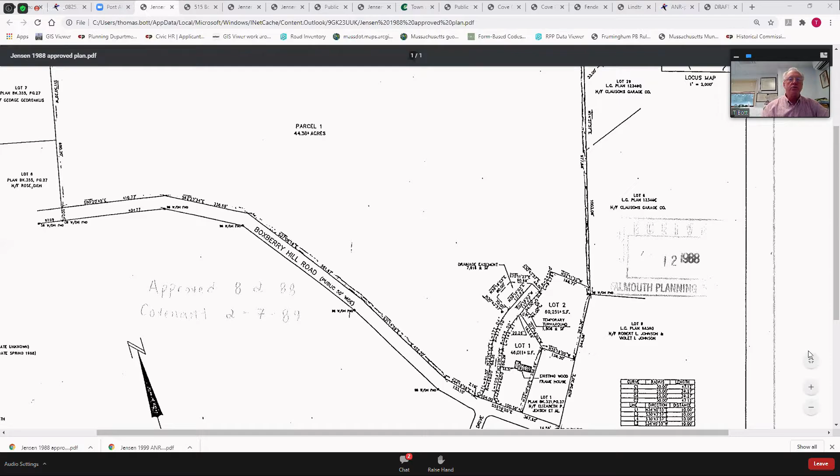So likely what you're seeing right now is a copy of the subdivision plan from 1988, showing this corner of the property in the bottom right here. I can zoom in a bit bigger if you like.

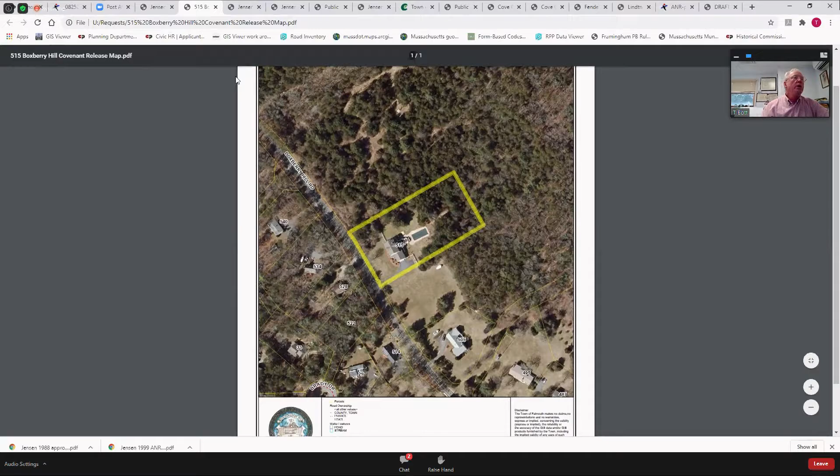Essentially, the subdivision plan was in this corner of the property. Mr. Jensen's property, 515 Boxberry Hill, is here in the middle of the property, and down on the bottom you see the remnant of the subdivision layout here. Mr. Jensen's lot was created by this A&R plan in 1999, as were two other lots and then a third lot in this corner here.

None are subject to the covenant because the covenant was for the subdivision here in the corner of the property. While the original parcel 1 was included in the subdivision, the planning board at that time had a provision in their decision that the subdivision would be automatically rescinded as of a certain date if the improvements weren't put into place. In fact, in 1991, that was expiring. Then around that same time, they filed an extension of the covenants until, I want to say, 1996. I have that on another screen here, but I don't want to trouble the board with too much of this. So the subdivision went away because of a lack of performance.

Lot 3 was created after the subdivision, and it fronts on Boxberry Hill. It is really not the subject of the covenant, nor were the other 3 lots created up here in the far left corner.

As I pointed out before, this is an artifact from an earlier subdivision plan—much like that commercial property we saw on West Falmouth Highway, where there was a covenant remaining for a subdivision plan that was actually office buildings at that time. So it's an artifact. It puts somewhat of a cloud on the title that someone had seen.

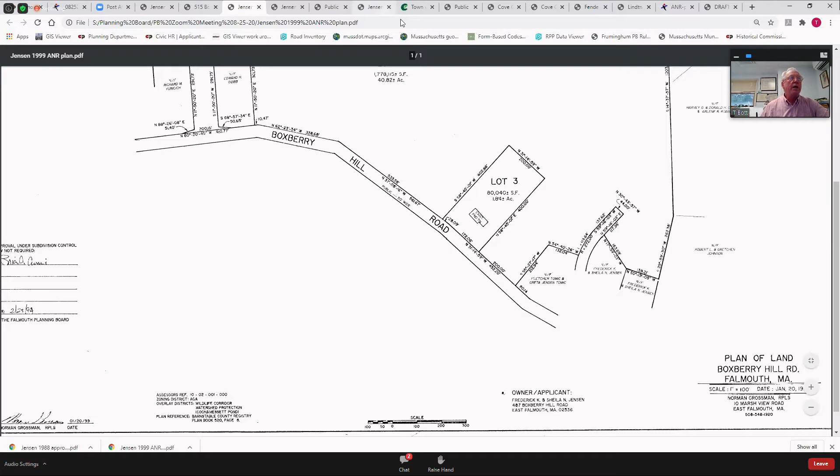You see both here and in the GIS that there is not a—let's see if I can get this out of the way. Both here and in the GIS, let's try that one. There is no second lot back there.

So 515 Boxberry, Mr. Jensen's lot, and the other 3 that were created out of this in earlier dates through the A&R process as well. I'd be happy to take any questions.

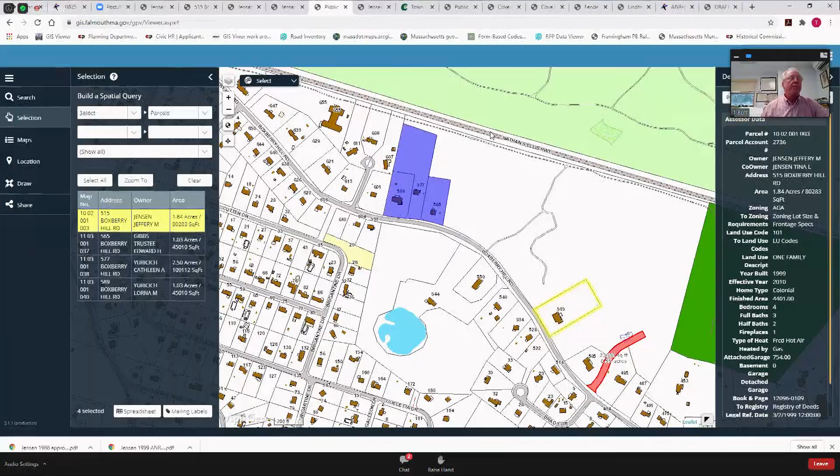Okay, does anybody have any questions of Tom? Yes, Jim: is there a letter in the file saying that the subdivision has been rescinded? That's all I asked, if there was documentation.

The decision from the planning board from 1988 had an automatic rescission—so if you didn't perform, the subdivision was rescinded. It's not a bad thing to put in all of our subdivision decisions. But there's nothing in the file that says the subdivision has been rescinded, other than the planning board's decision that says it's automatically rescinded if they don't build the road prior to this date.

But didn't they ask for an extension at one time and try to keep it? I'm just a little unclear about that. Let me just let you know that I saw that extension too. The extension actually had 4 signatures—of my parents and my aunt and uncle. None of them signed it. So I don't know how that thing came up.

Nobody signed it. If you look at it, Tom—I just saw that when I was looking through stuff, and there's a thing on file with the register of deeds and nobody signed that. You guys did the extension. I don't know how that worked out, but there were signature blocks for those 4 people, and see, nobody signed it. It's recorded. Somehow it should make this go away and we'd be all set.

Can we do that tonight? As soon as the board makes a motion to say we release lot 515 from the covenant, it'll all be gone away. So moved. Second. Okay, it's been moved and seconded. Is there any further discussion of this matter? Please, show of hands in favor of releasing the covenant. Okay, all 7 of us, by show of hands, have voted that.

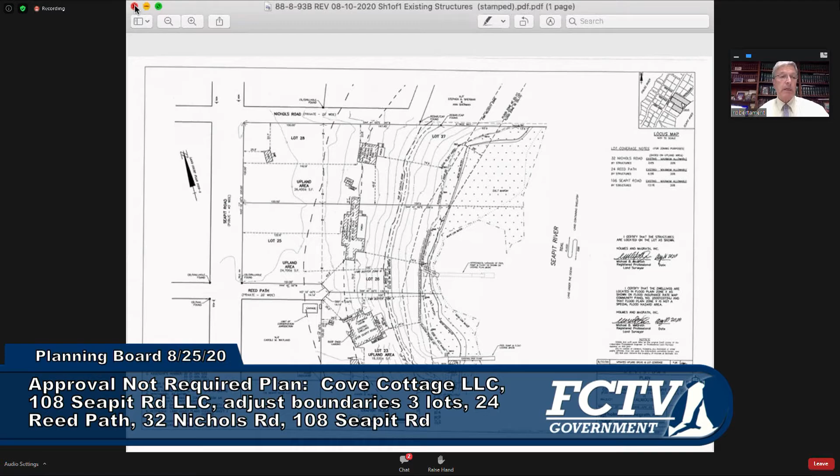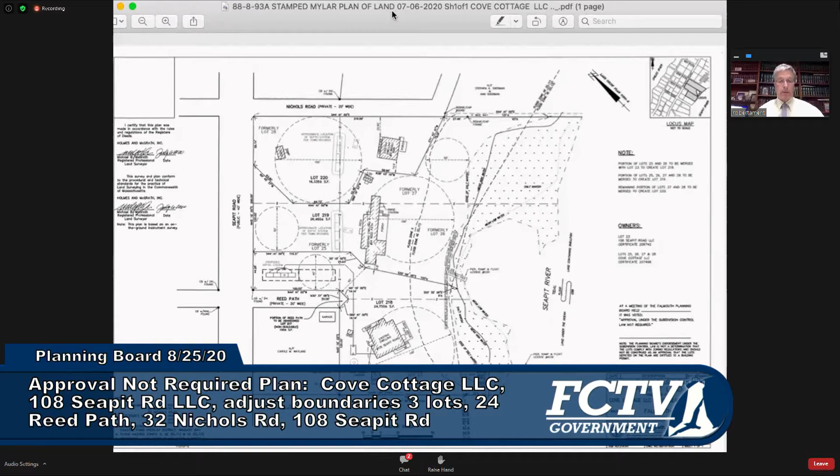So what I'll try to do now is go to the A&R plan, which shows how we're trying to adjust the lot lines. It says I've closed the sharing, so I'm going to do that again and try to select the right plan. Okay. So my hope is that you now see a plan entitled Plan of Land, and it shows new lot lines.

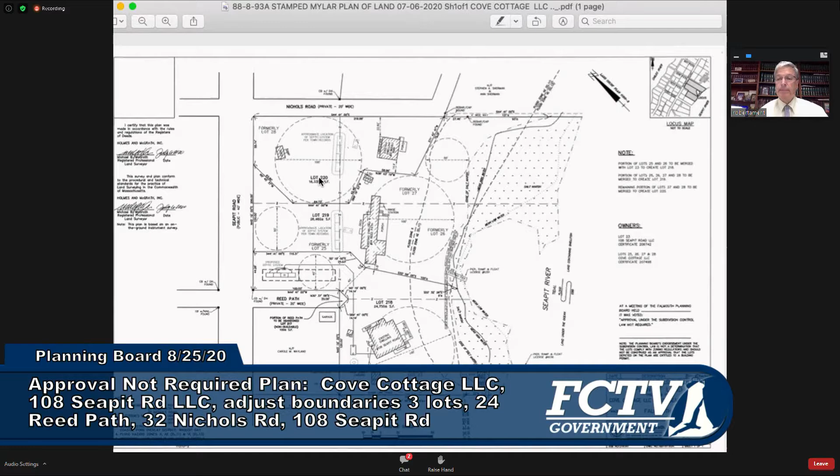This plan shows lot 218, 219, and 220. Is that a plan that you all see? Yes. Wonderful.

So this is the plan that's before you tonight for approval not required endorsement. What we're doing is taking advantage of the provision in the zoning bylaw that says the shape of two or more contiguous existing lawful building lots may be changed, provided the area of each lot remains the same or meets current requirements, and the total number of building lots is the same or less. It then says reconfigured lots shall not lose their building status, and no lot shall be made non-conforming as a result of this change.

So we have existing non-conforming lots, and they will remain. The new lots are non-conforming as well, undersized for one thing. So this plan does show in a dashed line the old lot lines running parallel to Reed Path and Nichols Road.

Our proposal is to make lot 218 at 108 extend all along the frontage of Reed Path and for 40 feet along the frontage of Seapit Road. The purpose of that is to give us a location outside of Conservation Commission jurisdiction, far enough away from wetlands to meet the town's Title V requirements, and to be able to install the septic system that's shown here, removing the septic system that's close to the house.

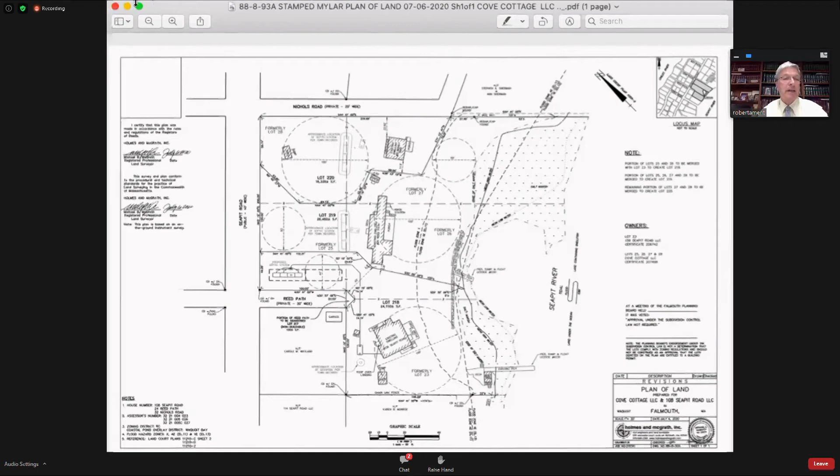Paul: Mr. Donovan, thank you for your explanation. I found this document a little confusing. It's creative engineering at its best. But will you tell me where the access will be in the future? For example, the lower lot formerly.

Well, the access presently to 108 Seapit is along Reed Path to that end of Reed Path. It was only 100 feet from Seapit, with that triangle at the end. We are proposing to eliminate the triangle as well, which doesn't add anything and really doesn't count as frontage. The Reed Path house, the middle house, is also accessed off of that driveway, off of Reed Path, again just 100 feet from Seapit. And there's a separate driveway for the 32 Nichols Road house off of Nichols Road.

Now, all of the lots will have frontage on Seapit, and the access in the future to 108 Seapit will be the same, but that Reed Path will serve only that house, although it also serves as the access to the adjacent property on Seapit Road owned by the Whalens, on the south side of Reed Path.

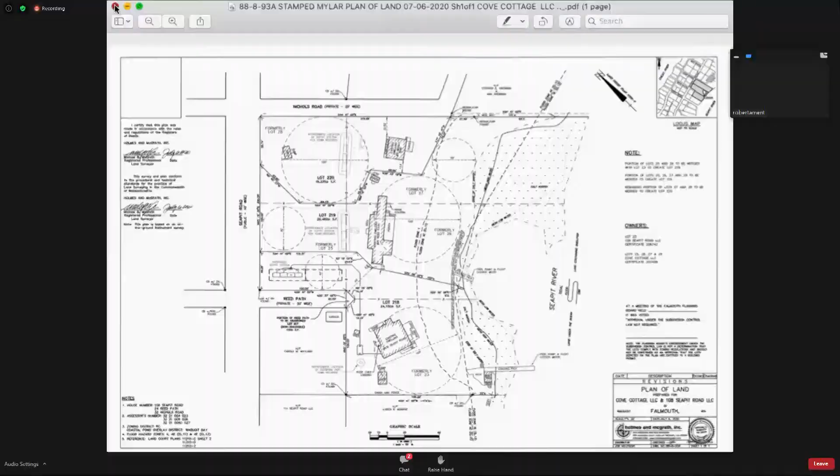Thank you, Madam Chairman. For the record, Michael Borselli, Falmouth Engineering. I hope you can all see and hear me. Yeah, Ken, and with your permission, I'll share the screen. Please. Hopefully you're seeing a plan of land for William Fender.

We have submitted an approval not required application to create 2 separate lots on Lewis Neck Road. Each of the lots has adequate frontage, which in this case is 100 linear feet. Each has adequate area, 40,000 square feet. Each lot has over 42,000. And adequate lot width, which is 100 feet in this zoning district.

There's currently on what we're designating as Lot 2, a single-family dwelling under construction. We've shown that on the plan to demonstrate that creating this lot in between Lot 2 and Lot 1 provides adequate setbacks, side yard setbacks 10 feet, and in this case, the building is almost 36 feet off the property line. There's a buyer for this house.

Mr. Fender would like to get an endorsement so that he can deed out a portion of the land to the buyer. You will note that Lot 1 is noted as not a building lot, even though it has adequate frontage, lot area, and lot width.

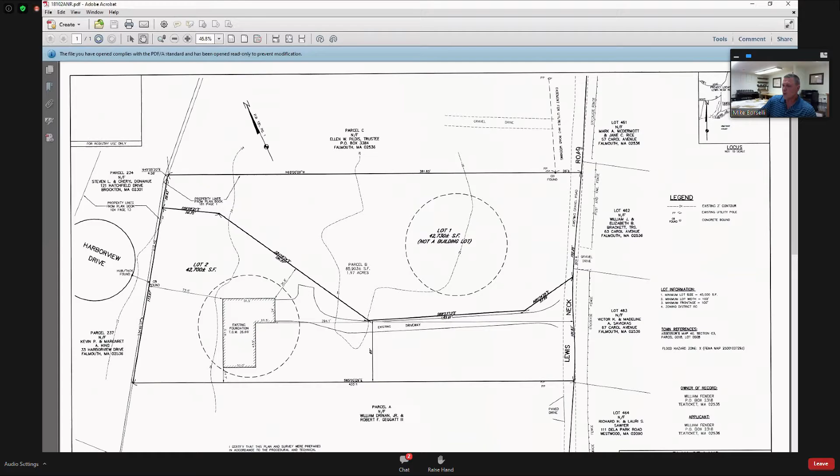Paul? Yeah, Mr. Borselli, I noticed on the lot north of there, parcel C, there's an easement that terminates at the property line. Yes. Would you explain what that means? Well, I believe that the abutting lot had created an easement for utilities and some future road widening that they have not yet exercised rights within, but it designated an area on the frontage that was available to either install utilities or widen the road.

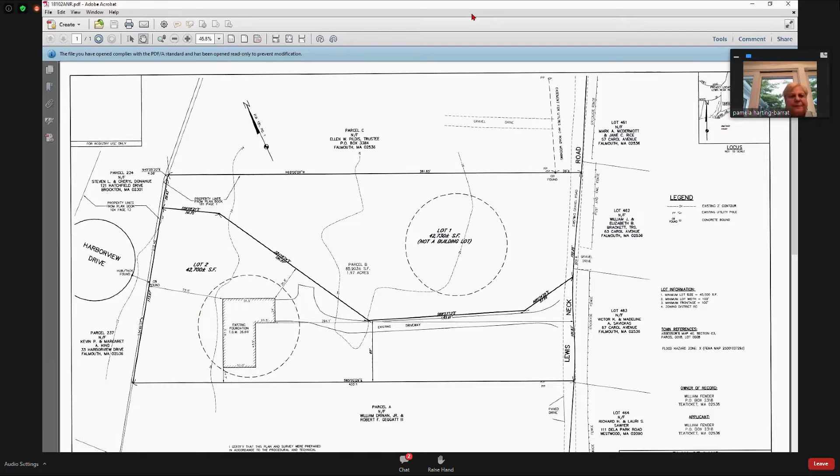Thank you, that has nothing to do with this project. It has nothing to do with this. Okay, now I can't see anybody else on, thank you. Does anybody else have any questions?

Jim? I did have serious questions about the adequacy of the road, but Mike pointed out—I did not catch the label that you've labeled the other lot not buildable. So that solved all my issues. I didn't notice that until you pointed it out.

Okay. And normally when we endorse an ANR, we do it without regard to buildability and zoning. Yes, okay. Thanks. So that note would also be on it, on our decision. I second. Jim? Okay, second.

So it's been moved and seconded. John? A question? Yes. As you said, ANR plans always show no regard for buildability, but one of these two lots is already built on. So I think we have to adjust what is going to be said on this ANR because both lots are included in the ANR, not just one lot. How would you adjust what we're saying?

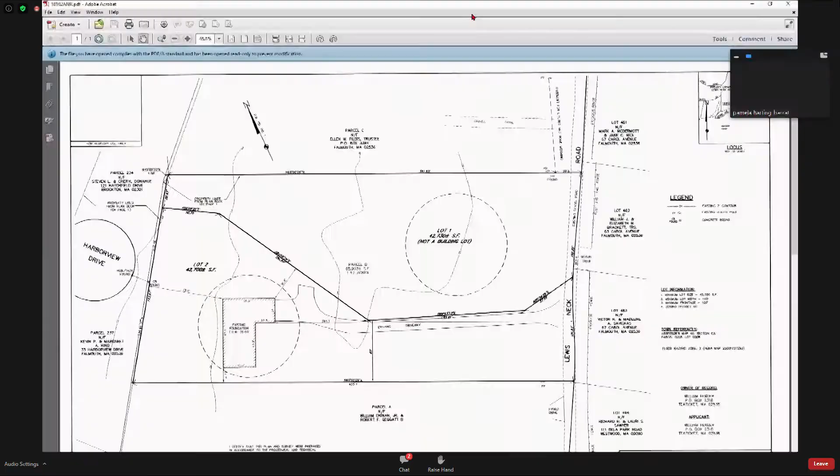Okay, thank you, Mike. Thanks again, and for the record, Michael Borselli, Falmouth Engineering, and I am joined tonight by Jeff Lintner, the property owner. The property the Lintners own is on Benjamin Nye Lane in North Falmouth. It has some frontage. I should share my screen, I suppose. How's that? Am I not sharing? Well, you're starting. Okay, now we've got it. So the Lintners own the property, and it has significant frontage on Benjamin Nye Lane. It has some frontage on Wild Harbor Road, and they own approximately 6.5 total acres of land. It's been in the family for a very long time. There are existing dwellings located on this portion of the land, and there's a house, number 72, located over on the far southeast corner of the land as well. The remaining land is undeveloped. So we're here tonight in hopes of getting your endorsement as approval not required.

This lot is in Residential B district with a minimum lot size of 40,000 square feet, a minimum lot width of 125 feet, and a minimum frontage of 100 feet. We have accomplished all of that with frontage on Benjamin Nye Lane, which has adequate access. It's a paved double-laned road that leads from Wild Harbor Road and connects through to Old Main Road further off to the east. So each of these lots has adequate frontage, lot area, and lot width.

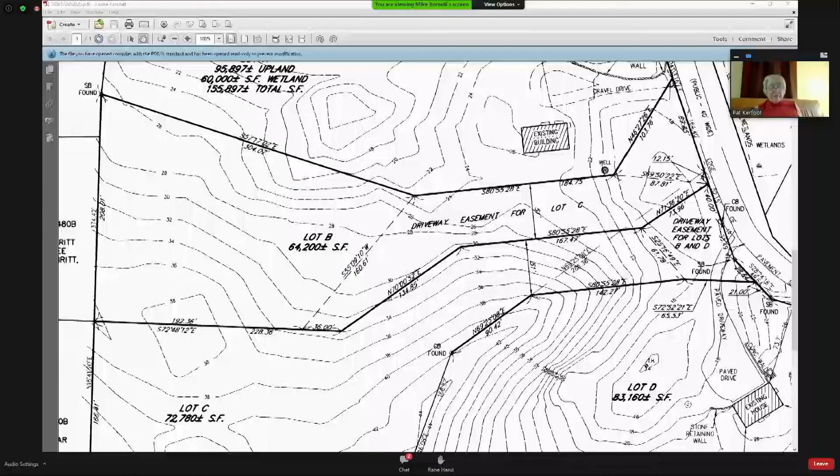The concept would be that the existing driveway, which is here, that leads to— Mike, I'm going to interrupt you, I can see what you're talking about but you're not screen sharing anymore. Oh, that's right, yeah, I gotta remember. But I can see on mine what you're talking about. Well, I was demonstrating with my mouse all over the place, no one could see. You were, but I can see the dashed lines.

I can understand that if it's a shared driveway easement, the topography helps us avoid this ridge. I mean, we could build a driveway here, but we'd rather not. The Lintners want to keep Benjamin Nye Lane just as a lane and have less curb cuts, less pavement, less driveways. So the idea would be to have a driveway easement to the benefit of Lot C over Lot B to gain access to where the home site would be back here.

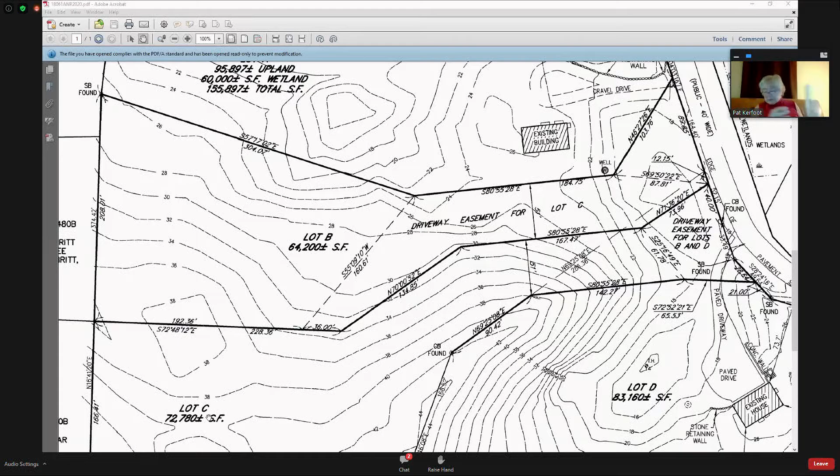It looks like everybody is okay with this, so I would need a motion. So moved. Second. Been moved and seconded that we accept and endorse an approval-not-required plan without regard to buildability—I always forget the rest of it, but the standard wording on it. Is there a second? Oh, there was a second to that. All in favor, please show of hands. Okay, we're all in favor of it. Thank you, Mike, and thank you, Mr. Lintner. Thank you very much and have a good evening.

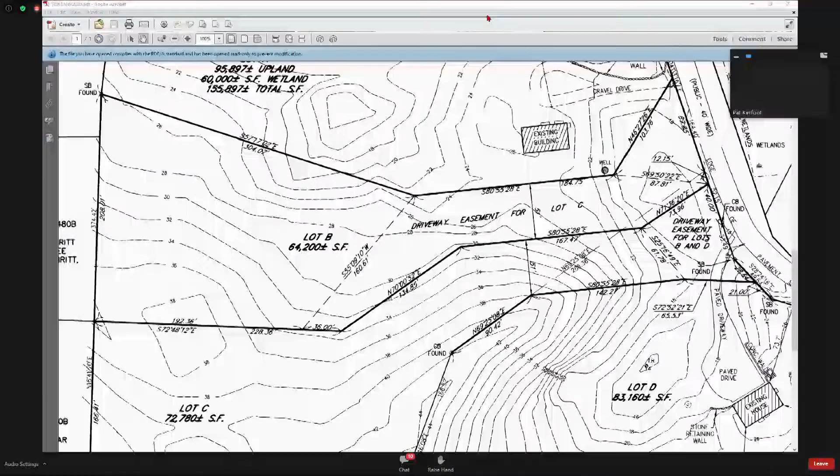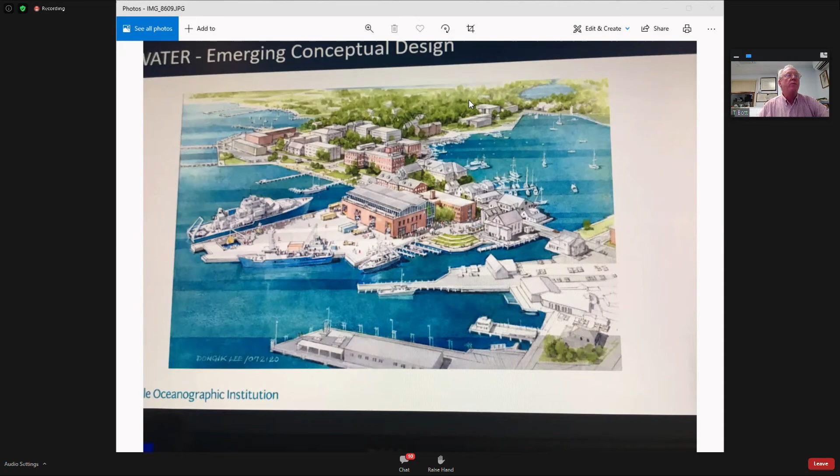I'm just going to share one brief picture if I could. This is some discussions we had with the folks at WHOI. This is the Iselin dock, and this is a new building they're proposing to do—demo the building that's on that, rebuild the dock with this structure here. It would not have anything to do with the planning board because it's not a 1,000 square foot change of the site. WHOI, as we know, is a Dover Amendment nonprofit, so we have limited site plan review.

But until we amend our site plan, things like that we're just watching go by. That might be fine with the board, and they're not building this anytime soon, but this is just one of those examples of where our bylaw needs quite a bit of work. So many things go by that we likely should be weighing in on, that we're not. Tom, could you flash that again? No, I just closed it. Sorry.

But it's representative of the kind of thing that can get by without planning board review, without site plan review, unless we amend it to be lesser square footage, lesser parking area. And there were a couple other things that were added in there too that we might very seriously consider putting in our bylaw. I really do appreciate Michaela's research on this.

Yeah, we definitely need a threshold for what trips the threshold for site plan review. It's not everything, but that threshold has got to be something that's reasonable, and I think more reasonable than what we've got now. But once again, my opinion as staff.

Great, thank you. So we have future agendas for pending applications. Do we have? I think we do have something. I just don't have it in front of me.